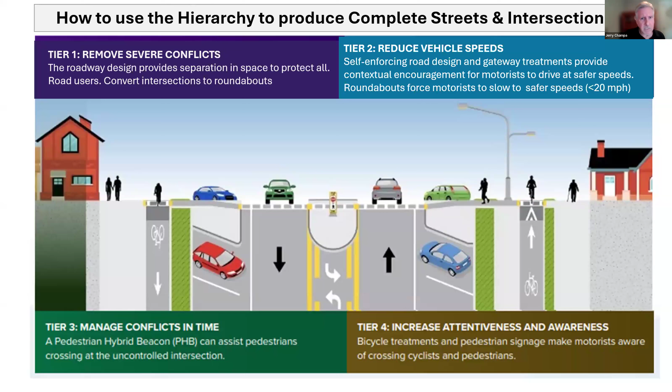What I did not cover yesterday, I just wanted to show this. This is in the roadway design hierarchy document as well, and it covers how to use the hierarchy. It's just a snapshot of how this would apply to a project trying to create a complete street. I'm not going to go through the details here, but this is the kind of information and general guidance available in the document. I think the link was on the slides yesterday.

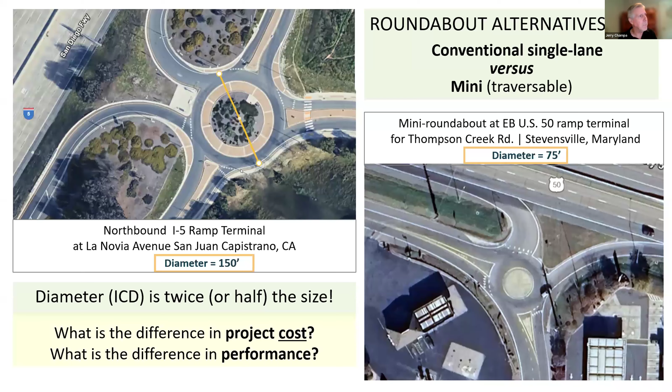As Phil was saying, this has been designed, tested, piloted, evaluated, redesigned, and strengthened over a 10-year period. So in this case, we're putting in what would be a quick build, low cost, but permanent installation. I just wanted to emphasize that these can be permanent installations, not just temporary or interim, even though they are modular. I'm hoping that with those slides, maybe that will help generate a few more new questions. So that's all I have.

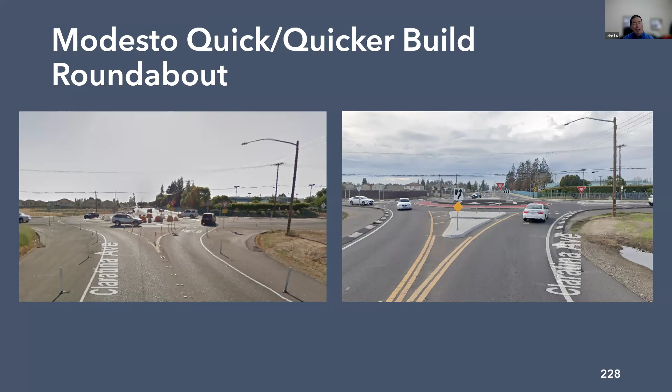Okay, next on deck we have Brian Ray. Brian Ray is a great friend of Caltrans. He has over 35 years of practical experience and has supported Caltrans since 1999, when we were just starting to explore roundabouts on the state highway system. He's been involved with numerous national research publications applying performance-based planning and design, including ramp and interchange spacing.

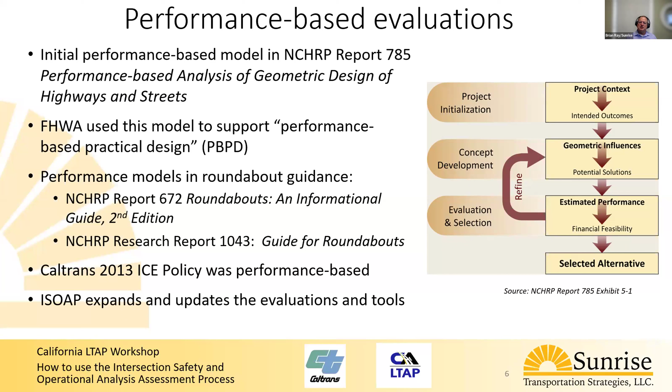I've always been a champion of Caltrans' ICE policy and ICE activities. I've always found that the flexibility in the ICE was really a benefit compared to a very restrictive, prescriptive approach. I'm hoping that when we look at ISOAP, it still contains the value of the flexibility and the engineering judgment without being too prescriptive. And I think ISOAP is going to be a really nice positive change in addition to go on from where the ICE policy was.

So I want to just highlight that performance-based evaluations and performance checks aren't just part of roundabouts. When we did NCHRP report 959, the Diverging Diamond Guide, it's actually based off of looking at real case studies and examples of elements we might want to do differently, and legacy elements we don't want to do anymore. It identified general performance categories, verifying that design users are integrated into the process, not accommodated later on, but integrated into the design.

Even chapter 6 highlights that when beginning your DDI design, you should start from the inside and work out - from the pedestrian area, if that's where it's going to be, and work outwards from there, from the center of the roadway and out in terms of your crossovers.

But it goes back to the fundamentals of intersection design and roadway design - stopping sight distance, intersection sight distance, view angle considerations. So if you're thinking about roundabout performance, you've done those speed checks, you've done intersection sight distance, you've looked at view angles.

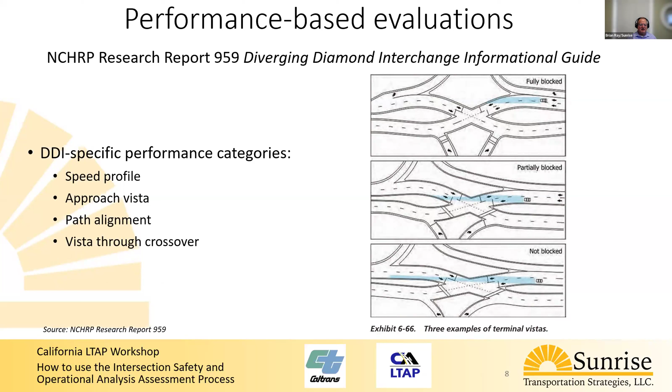If any of these terms are new to you, I encourage you to look at chapter 6 of the DDI guide, because many of these follow the same basic principles from the roundabout guide, the work you've been experiencing before.

ISOAP - it's a pleasure to have been able to offer some input about ISOAP. One of the things I tried with John was to get rid of the word 'process', just stop it at the A, let's just have it as an assessment, but I couldn't make that influence. So now, just like the word automatic teller machine becomes ATM machine, you have the ISOAP process.

We'll get there. But as we talked about yesterday, if you listen to Bastian, it's really an intersection control methodology. And this methodology itself has been evolving nationally since the mid-2010s. Caltrans was a really early adopter in doing some outstanding work with the ISOAP, but other states have expanded the ICE tools and evaluations.

SPICE is the safety performance of intersection control evaluation. It was a planning level tool prepared by the Federal Highway Administration. CAP-X is a very simple approach to using planning tools to test capacity and operations.

They're all meant to aid and guide what you're doing. One of the things I think is most important, that John Liu had indicated, is the tremendous flexibility - you can use these tools, but you're not obligated to. You can use rules with them, you can use other methods, and of course if you have the data, you can go in and do more evaluation in more detail. But the intent is to be flexible in making your choices.

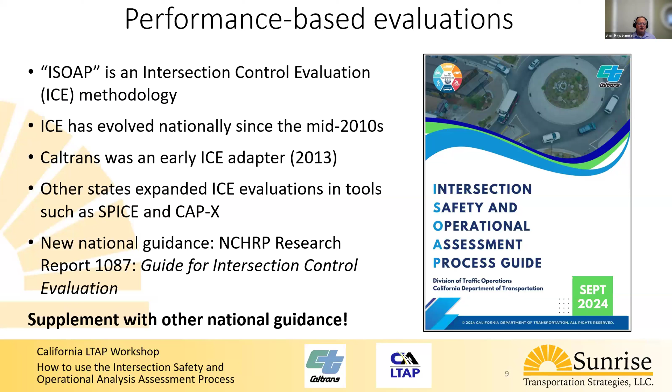What we also want you to do is, just like Jerry was mentioning, use the safe system approach, the SSI safe system for intersections. There's a lot of other national guidance out there, and all of these can complement what you're doing with the ISOAP. The ISOAP guide is a great framework, it helps you get along, but I don't want you to be restricted or limited by it. Be comfortable using other tools and areas. The key is to document what you're doing, have conversations with your project team, and use this other information. So use ISOAP for good and not evil, okay?

In summary, performance-based analysis and design is really excellent because it allows us to tailor solutions to meet project needs. I know you're used to the Highway Design Manual, but if you look at the 2017 AASHTO policy, it identifies the ability to categorize projects as new construction, reconstruction where you're making a fundamental change to upgrade the facility, or where you're essentially reconstructing the roadway and leaving it in its present form.

If we start with those as the basic category of project, it means we can establish design criteria tailored to meet that project need, but it gives us flexibility in design. By identifying what we're trying to achieve, it allows us to justify decisions. So if we're working in a roundabout with approach geometry, having 35 or 40 mile per hour speeds on a state highway can be okay. We don't need to justify 55 or 65 mile an hour curves at that roundabout. It allows us to use the performance in that roundabout influence area to make design decisions.

What's fantastic about the intended outcomes, which you'll see is part of stage 1 of ICE, is it allows us to optimize the value of the project solutions. By really documenting what we're trying to achieve in a project, it also allows us to reduce our liability, which is an important part of our decisions. Design flexibility without any reasoning isn't very good, but having a basis from which we start our design, using design flexibility and documenting it for the conditions we identified and agreed upon at the beginning, is what helps manage our risk.

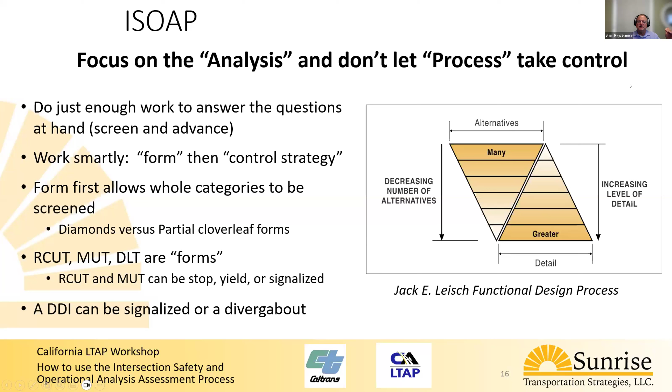When you're looking through your ISOAP, it's going to be really easy to just pull up the list, but you want to be thoughtful about how you apply the solutions when working at the list. I was just in Atlanta last week at the Transportation Research Board Roundabout Compendium and International Symposium, and there was this huge push for everybody to come up with a fancy new name for their roundabout. I heard something called a super spiral, a turbo-esque, a turbo diesel, just ridiculous things. Don't do that. There's always going to be a new interchange form, a new intersection form, and somebody's always wanted to coin a fancy name. But that doesn't always mean that just because it's out there, the form is appropriate.

So this is a list of what's called control strategies, but what I'll tell you is these are actually intersection forms, not control strategies, so we've got to watch that out. A continuous T intersection is for a three-legged intersection, so if your intersection is a four-legged intersection, you don't have to look at a continuous T or go down that list.

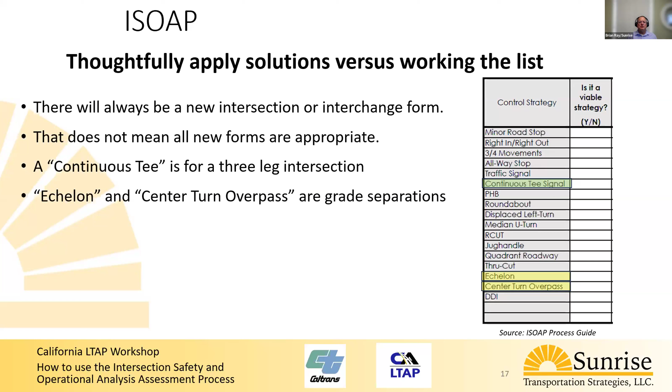An echelon and a center turn overpass are grade separations. So if you've looked at your project, intended project outcomes, your budget, and the environment around it, neither of these are going to be appropriate if an at-grade solution is what you're looking for at that location. The echelon has been around in name for probably 20 years, but I don't think there's actually an echelon on the ground that I can find. I did some search, it's been investigated, it's got a super cool name, but I don't know if you can find one that's actually in place. So be very careful about that.

If your location doesn't allow for grade separations, then you don't have to look at these—don't spend any time on this stage. And remember, a pedestrian hybrid beacon is really for pedestrian quality of service. It's an outstanding form, an outstanding control.

We want to think about all types of high visibility intersection forms, but be thoughtful about where and how it goes. And remember, a diverging diamond is just one variation of diamond forms. It's a great form because it has that displaced or relocated left turn that reduces crash severity. But there are other diamond forms too that have those same qualities of displacing a left turn and reducing that crash risk.

The important part for you is you have a list—consider this as a starting point, something to get your mind going. But know that anytime this list is put together, it's never going to be comprehensive. There'll always be something else. So be careful of that. Work the solution, don't work the list.

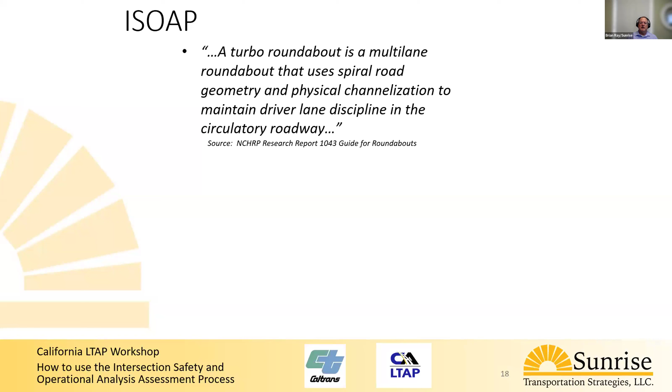This is a quote from the Roundabout Guide: a turbo roundabout is a multi-lane roundabout that uses spiral road geometry and physical channelization to maintain lane discipline in the circulatory roadway. I wrote that—that's chapter 10. The reason we wrote this is that the term turbo is one of these exciting new names. Woo, it's a turbo, it's a super turbo, an inverted turbo, a hyper turbo. The whole point is we get caught up in the names and forget what we're really trying to do. It's a multi-lane design. We had issues where lane discipline isn't there, and there are physical features to address that.

So this is your SR 156/25 intersection. Not all turbo forms have to be of this Dutch variety. This Dutch style shape is really excellent in the constrained environment. It was really appropriate to address that merging and diverging on the skewed intersection approaches. Those physical forms and elements were a great solution at this location.

Fantastic, rock on, good. But we can also introduce turbo characteristics or turbo elements. This is an example in Sarasota, Florida, where it's a multi-lane design with raised features intended to support lane discipline. I say that because I don't want you to get caught up in something shiny and exciting—recognize we can borrow and use the same elements and move away from the shiny names, and think about the performance you're trying to achieve.

What's the performance I want? I don't want people changing lanes in my roundabout—that's where it comes from. This is just an example of one of the approaches on this roundabout. It has path alignment that aims you into the circulatory roadway, physical features that help keep drivers in their lane, and uses raised pavement markings and enhanced striping to support lane discipline internally.

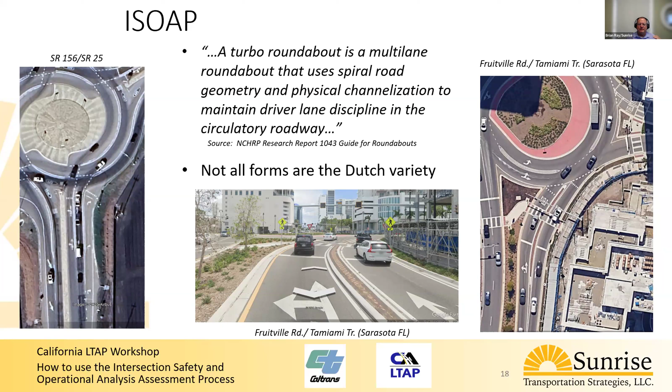Interestingly, Georgia DOT is beginning to introduce raised features on their roadway approaches for multi-lane designs—not necessarily throughout the roundabout, but at least on the approaches. I want to share that because I don't want you to get caught in the name turbo and suddenly think you have to hire an expert for its mystique. No, it's a turbo as a way to keep people in their lanes. The features are the same. Hope you're catching that.

So learn the forms and then use the correct names. These are names over the years of intersection forms that were used to market and sell the form—some of these were actually sold. A CFI—boy, I wish I had thought of the word CFI. A continuous flow intersection takes a single intersection and breaks it into 5 other signalized intersections in total, and still has the nerve to call it a continuous flow. Man, you gotta love that.

Super street—ooh, gosh, that makes me feel good, I got a super street. I have an urban interchange—wow, I can only use my urban interchange in urban areas. Or I have a Michigan left—I guess it won't work in California, it won't work in Florida. Did you know that a HAWK signal—I hear that, I was at a conference last week and somebody was asking me about a HAWK signal. It was actually originally called a HAWK beacon, and HAWK stands for High-intensity Activated crossWalK.

It's one of those crazy things that somebody saw that the British have pelican crossings, toucan crossings, and in Tucson, Arizona, somebody wanted to create this beacon and came up with this high intensity activated crosswalk and then put the name HAWK to it. Again, like continuous flow intersection, HAWK.

Don't know how that worked through, but you got to love the creativity. But in the United States, we can't have signals rest at dark. What happens when a signal rests at dark? It becomes an all-way stop. So it has to be a beacon. So originally the HAWK was actually called a beacon, but what do we call it now? Well, now it's formally called a pedestrian hybrid beacon. That's the origin of the name. So let's start calling them pedestrian hybrid beacons, or PHBs.

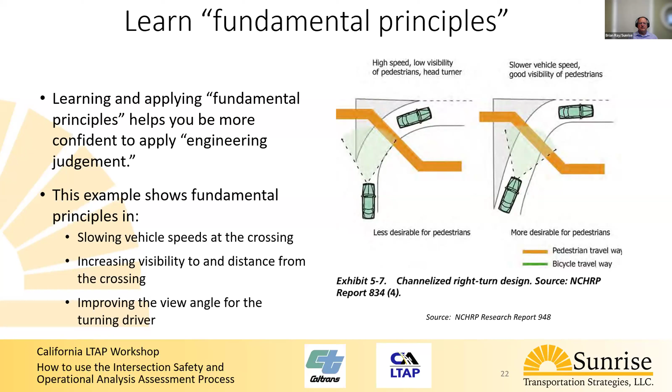And so while this view angle - this is a diagram showing it as a lane add - many times we used to pull up these diagrammatics or have intersection designs where there's no view angle for the driver. So learn intersection fundamentals and apply those. That's what's going to help you learn how to say yes.

Learn new concepts. Are you familiar with protected intersections? They're using design elements to reduce conflicts between pedestrians, bicycles, and motor vehicles. The principles of protected intersection are to minimize exposure to conflicts, reduce speed at conflict points, communicate right-of-way priority, help people understand how to use the roadway, and provide sight distance.

Now, do those five principles sound similar? While they came out separately, these are a lot of the same kind of elements as Jerry was highlighting - the roadway design hierarchy: removing the conflicts, reducing the speeds, managing time with our conflicts, or increasing the attentiveness. So this concept of protected intersections is something that's relatively easy to do.

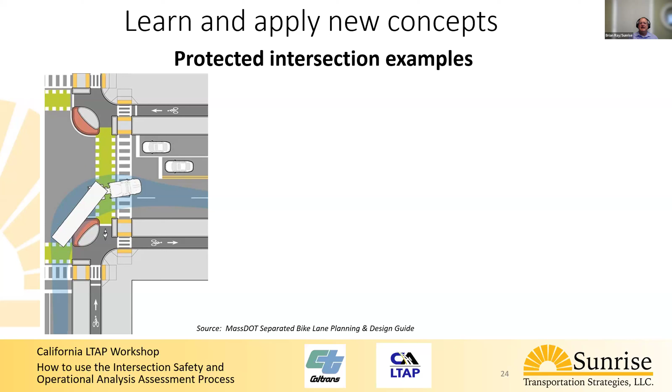And so here are some examples of this. If we look at this tight location, probably very urbanized, what you can see is it's an environment with many users. That truck is turning very slowly, but if you look at the pedestrian facilities, they're separated from the bike facilities. There's a separation between the bicyclists and the pedestrians. The truck that's turning can't right hook the bicyclist who's in the intersection.

And here's just, again, a diagrammatic from the MassDOT guide. But what you can see here is we're starting to look at each of the users and design for each user.

And for you as geometric designers, look at all this great stuff we can possibly do. We need to know what size truck that is, whether it's an STAA or California legal that we can cover. We want to be thoughtful about the environment, and we may not be able to do this in all locations, but I want you to be aware of where this works. Did you realize that NCHRP Research Report 1043, Guide for Roundabouts, has similar elements in it?

Gina highlighted this, that your Caltrans HDM still references and uses the principles from NCHRP 672. That's okay, 672 is still really good. This 1043 document greatly expands on the contents of 672 and provides a lot more information.

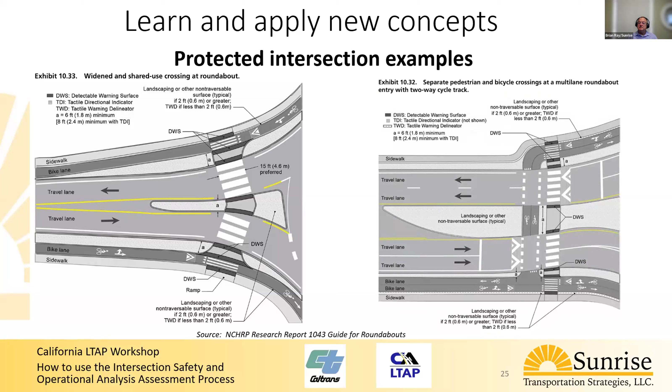Here's a simple single lane roundabout design with treatments for pedestrians and bicyclists. What you'll see is we're separating out those users. And here's another example at a multi-lane design where we can separate out the peds, the bikes, all of those users. While we often think about that at the crossing location, if you look at either edge of those roadways, what we're doing is detectable warning strips, looking at the conflicts between the peds and bikes, as much as the bicycle and peds and motor vehicles. So this stuff is around here.

Also, what can you do to learn how to say yes? Understand precision versus accuracy. So here's our roundabout guide, here's our typical way we can look at things. You've done this before: you calculate an R1, you pull up the table from AASHTO. It's highly impressive because it has funny numbers and diagrams in it.

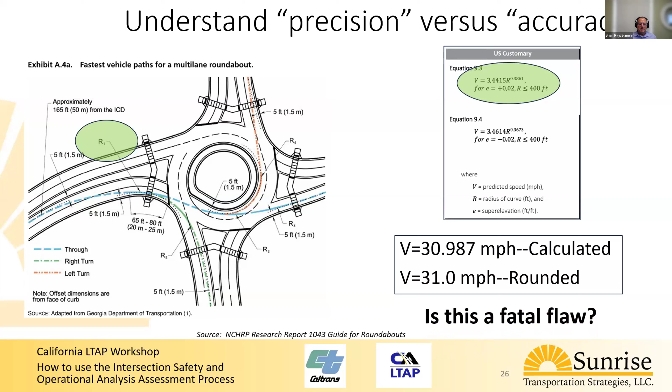You put that radius in, compute for the speed, and come up with 30.987 miles per hour. That's what you calculate, man, that's good. Well, I don't think I can carry it out that far, I'm going to round it up to 31 miles per hour. Okay, well that's a pretty big move there. But what's the entry speed for a multi-lane roundabout? 30 miles per hour. This is 31 miles per hour. Oh my gosh, is this a fatal flaw? Is this roundabout thrown away? Oh, I don't know, what am I going to do?

Well, let's understand where this comes from. First, when we compute our speeds, it's based on picking a portion of that 65 to 80 feet at the entry. Make sure you're back about approximately 165 feet from the outside edge if I'm using ICD, if I'm using CAD. Let's go ahead and draw that fastest path. Which way do I do it? How close do I do it? We all do it a little bit differently. Okay, so that's how we got that R.

Well, let's take a look at our vehicle. Clearly every vehicle in the world is 6 feet wide. So clearly when I'm using my offset of 2 feet to a fixed object, it's 5.0 feet. All my curbs must be the same. All my drivers must be the same. All my vehicles must be the same.

But the real important part here is, what are the project considerations? Are there other curves in here? What's the environment around it? What's the message that the land use is telling us? Do we have features and elements up and downstream? Is it part of a roundabout corridor? Is it the first intersection off a ramp terminal interchange where nobody can pick up speed? We need to think about all of the project considerations, or what's the benefit of this roundabout compared to the other intersection form?

So that leads me to this: don't hold out for perfection. Focus on optimal solutions and how they attain the greatest value for the project. If we think about our existing condition, what are we trying to achieve and whom are we trying to serve? There's probably some sort of ideal design, is it a nominal approach that Gina was talking about yesterday, where I have to pick a value from our standards? But the key here is we often get so caught up into what's optimal, but what can't I achieve? What's missing? I can't get that standard, I can't get the 500-foot radius, I can only get 450 feet. And we get caught into that, and we're afraid to make a decision, and we don't know what to do. The point here is, let's focus on what we gained.

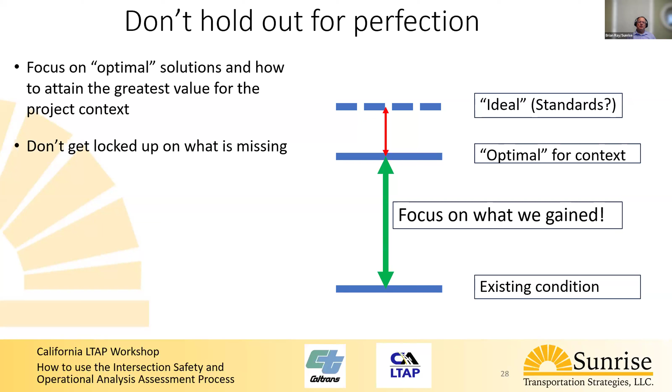How many projects that were really, really good projects ended up as no-build because nobody could make a decision, because we were looking for the optimum, the ideal, that we had to have perfection. There are a lot of places, even in Caltrans, where good roundabouts didn't get put into place because people were looking for the ideal and following some criteria that was non-attainable. Gina mentioned this yesterday, and I had it in mind too: a roundabout design that is less than ideal could still provide superior safety and operational performance over other alternatives. The point is, let's see what we can get from the roundabout, let's not worry about perfection.

So in closing, you are in a fantastic organization, and I'm proud to be able to work with Caltrans. You're implementing policies that support reduced crashes in total, but especially severe and fatal crashes. You have the opportunity in your planning and design decisions to save lives and money while you do it. You get to be the stewards of the money around you. And what I say is, challenge yourself with continual learning to gain confidence in making your planning and design decisions. So that's my pitch, and I'm sticking to it.

So I'll open it up to questions. John, I hope I get to be invited back some other time. I haven't upset the cart.

Great, thank you so much, Brian. You were just so chock full of information on various topics. You covered technical things, practical design, some philosophical things, and I think really a good challenge to each of us to be the best engineer—and planner too—that we can be. We all have limited resources to build our projects, so I think he had a lot of things we could all heed and really improve ourselves. We do want to open it up for questions.

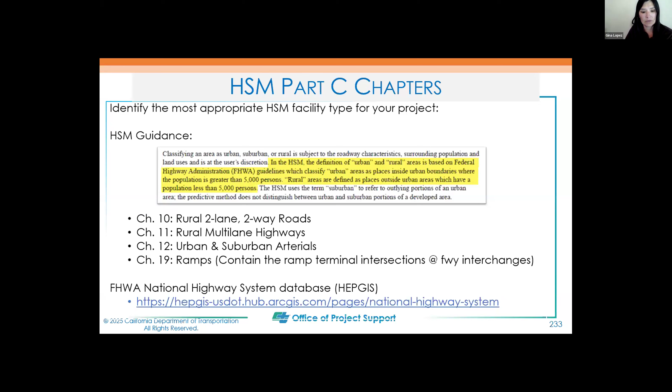Something I want to note right off the bat that you won't get from this cheat sheet: I highly, highly, highly recommend popping open that highway safety manual. Again, this is a cheat sheet. It's a starting point, but there's so much more detail and additional information.

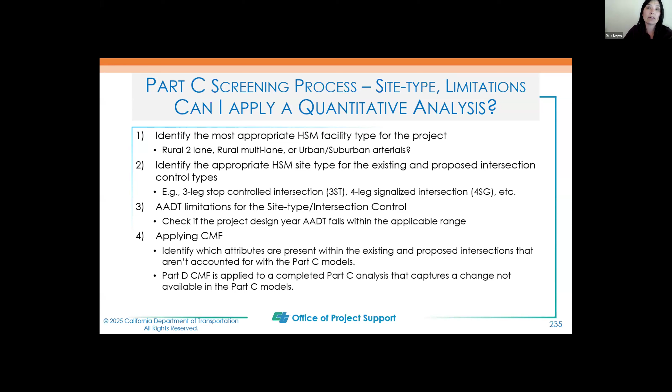So again, this just basically goes over the steps. And number 3 is kind of reminding me to go back, because the limitations on the traffic volumes that these crash prediction models can handle can be a roadblock at times. And then the CMFs are also going to be different. So your crash modifications, your Part C CMFs, each of your crash prediction models takes into account different geometric features and different traffic control inputs.

We talked about the limitations and focused on Part C, but I want to really talk about Part D, the difference of using Part D quantitatively versus qualitatively. This is going to help us fill those gaps when we do have limitations with the Part C models. We get this question all the time: are you using Part D quantitatively or qualitatively? Because there are two different ways to use the Part D CMFs.

Essentially, these are standalone crash modification factors. They are apart and separate from the Part C crash prediction models. That's why they're in a completely different part of the Highway Safety Manual itself. We've talked about crash modification factors all afternoon yesterday, and we're going to continue to talk about crash reduction factors, crash modification factors.

I think we all realize that these are basically either a countermeasure or representative of your change in crash frequency, depending on how we're applying it. And there's two main ways, right? Quantitatively and qualitatively. I think the two definitions are pretty self-explanatory. Our preference is to use Part D quantitatively if we can.

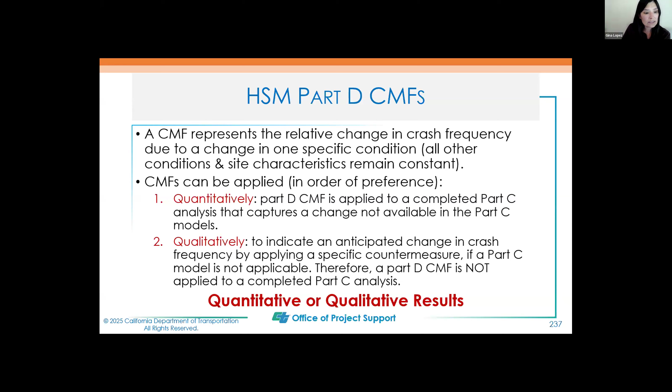A lot of limitations - if you cannot apply the HSM quantitatively, then you can resort to a qualitative analysis. And this is essentially where you're going to go: the FHWA CMF clearinghouse.

Many times in our live trainings, I would reference that all of the percent reductions in fatal and injury crash severities that Jerry and John and all our good speakers have been talking about came from the CMF clearinghouse. Sometimes there will be a direct reference to the crash modification factor report that study came from. So when Jerry's been stating the reduction, that's essentially the same thing as a crash modification factor. It's just your CRF is 1 minus the CMF. So when Jerry said roundabouts are showing up to 80, 90% reduction, basically you would say my crash modification factor is going to be about 0.2, 0.1. It's your 1 minus 0.8 or your 1 minus 0.9.

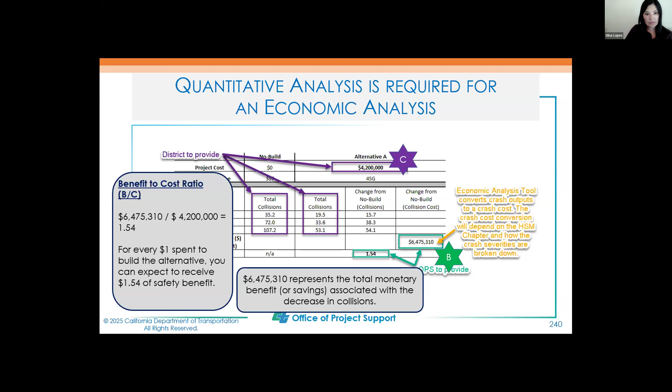So with that, I think, John, you're going to quickly introduce the example here, and then Bernice will walk you through how we actually applied it to this specific project for ISOAP.

Yeah, so I just want to set up this example. This is in the city of Mendota, which is about 35 miles west of Fresno. And this is a roundabout that's actually under construction right now, but we chose this location as a test case for ISOAP and the HSM.

So it was actually run under ICE, but as an exercise, we wanted to apply the HSM to it. At this location, the city received a CMAQ grant to build a roundabout at the intersection of two state highways, 180 and 33. These serve as the main streets for Mendota, two-lane conventional highways. There's about 16,000 vehicles entering the intersection every day, so that's well within the realm of a single lane roundabout.

So the idea was to realign the intersection, the junction at McCabe. McCabe is an access to a residential street, also provides access to a school. You have a fire station right at the corner. And just to kind of clean it up, we wanted to create a four-legged intersection. There's a lot of costs involved, but at the time there was enough money with the grant and other sources of funding. Next slide.

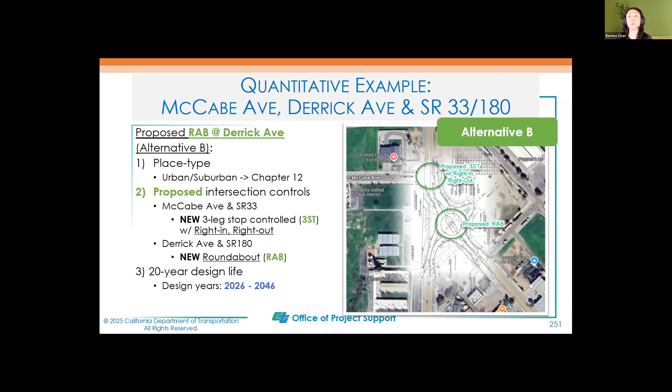As we recommended earlier, when we hit a limitation relying solely on the Part C models, we may have to turn to Part D CMFs from the clearinghouse. Please be aware that when searching and entering keywords to query the clearinghouse database, it can be a little tricky and takes some time to get used to and become proficient with, like Gina mentioned.

When we queried this in the CMF clearinghouse, we didn't put all those words in. We picked out specific words, tried them in the query, and went through the results. For anyone not familiar with the clearinghouse, searching with query terms and words may kick back a lot of different results, and some of those may come from different parts of the world. You may not want to use the European ones because our context is different than theirs. So it takes some time and patience to sift through them to find the best match.

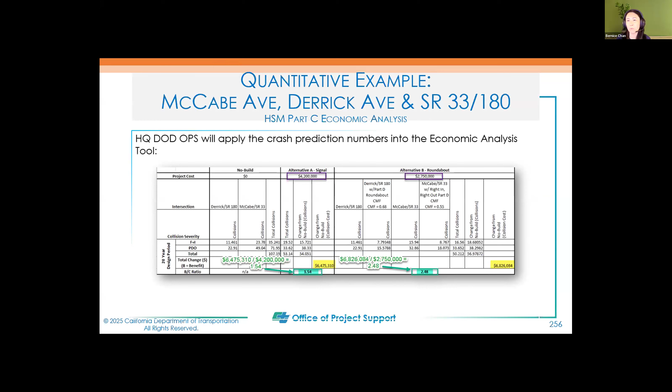I know I went through that fast, but unless Gina has anything to add, I don't know if we have time for questions. I do know Jerry's coming up after us, and we have 5 minutes left for this segment.

There's actually a question I would like to address from the chat: where does the CMF Clearinghouse get their values from? Good question. I want to come back to this slide, but yeah, I'm going to go back to the CMF.

They come from all over the world, from researchers, possibly NCHRP studies. Essentially anybody can propose their results and research to be uploaded into the clearinghouse, but it has to be vetted through. I'm not sure of their exact process for getting approved into the CMF clearinghouse, but there's a ton of information on how they come up with the CMF and the star rating, including how much weight is given based on number of sites, years of data acquired, and type of analysis performed. So they come from all over, but there's a vetting process to get your CMF uploaded into the database. The most important part is that they come from project evaluations, before and after project studies.

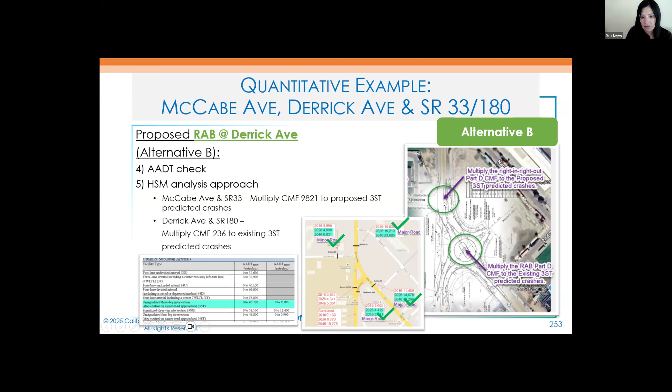For this particular instance, applying the right-in, right-out CMF to the proposed condition - something we didn't talk about was another addition to this project, maybe easier to see on a bigger scale - they implemented a left turn pocket from the main line onto McCabe. If you're not familiar with what the HSM can take into account, you don't even realize that's a change from existing to proposed condition that the HSM can account for.

So we need to rerun that analysis for the proposed condition, because that's what we want to multiply our right-in, right-out CMF to - the proposed condition - since there were additional features the CMF can account for. If you strictly go to the spreadsheet tools without understanding what you're actually inputting, you will make errors because you're not familiar with the background of what you're telling the crash prediction model. You could either over-account for the safety benefit, or under-account and cut yourself short.

All right, any other questions, John? I guess we could answer them via the chat. Yeah, there are some questions in the chat and also in the Q&A box, but for time reasons, let's go to Jerry. He has a bit more to talk about safety performance, and then we'll see if we have additional time after that for additional questions. Okay, so Jerry, I'll hand it off to you.

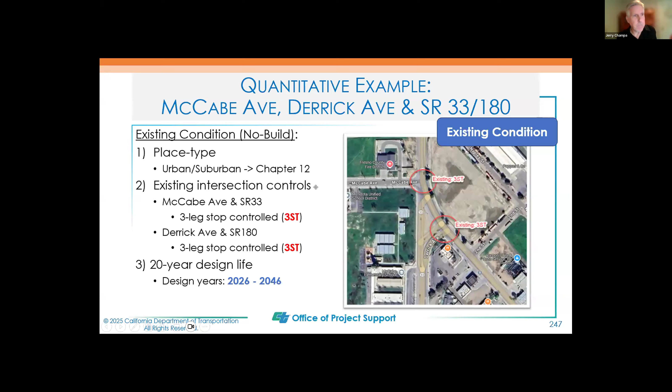So what I am going to cover in probably the next 10 to 15 minutes is a methodology for calculating the collision cost savings, which is the benefit we get from implementing mostly safety improvement projects and other projects. This is specifically a methodology that was created back in 2013 when ICE was first adopted, and this tool was created to help us calculate the benefit cost ratio and collision cost savings for control strategies.

I want to mention also that this methodology is currently being used by the local highway safety improvement program. All local agencies that submit applications for safety grants involving roundabouts in particular use this spreadsheet tool, which we call CCA, or collision cost analysis. Caltrans is actually currently using this same spreadsheet tool to develop the crash cost savings and benefit cost ratio for roundabout proposals on the state highway system. So it's an extension of the Caltrans safety programs methodologies - it's as performance-based as you can get, and it's based specifically on Caltrans crash data at intersections across the state highway system.

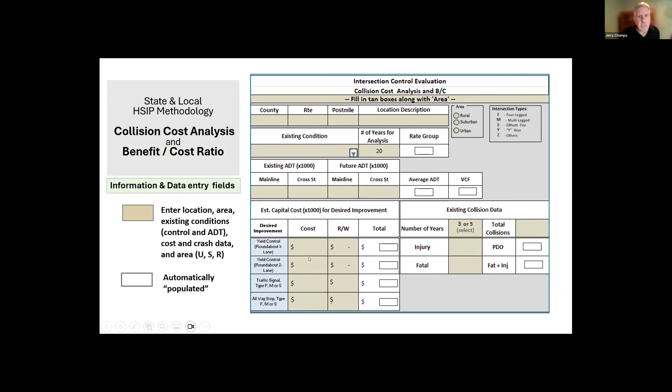Okay, so this is a blank version, the top half of the form where the inputs are put in. As you can see, there's two types of boxes here for the user to enter, but also some of these are automatically populated. Let's go to the next and start to look at what this would look like.

And then volumes in terms of ADT for mainline and cross street. These are for both the existing ADT, but also for future year conditions as well. Most importantly, we have the crash data that is entered in the right half lower part. You end up having a number of total collisions, number of injury and fatal collisions. Some of that gets populated automatically. The only thing remaining to be entered here are the cost estimates for the alternatives that are under consideration.

So again, what we're looking at here are control strategies. That's the limitation of this tool. It has a single-lane roundabout, a two-lane roundabout or hybrid, and then traffic signal and all-way stop control, those being the most common improvements that two-lane or two-way stop control intersections are usually converted to for safety improvements. Let's go on to one more slide.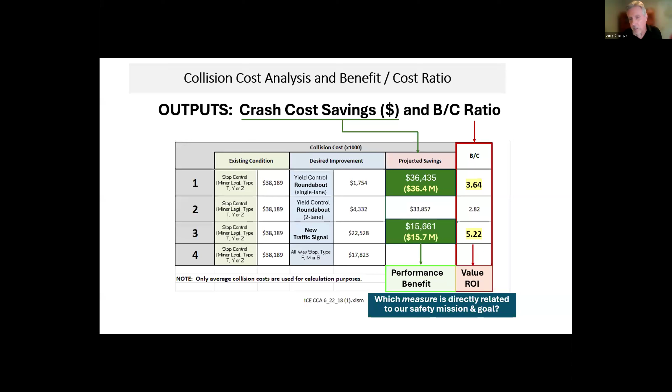Let's go one more slide. Ordinarily, if we had more time, we could talk about where this stuff comes from, where these outputs come from in terms of the numbers, the collision cost savings.

And time doesn't allow it. It is rather difficult to explain. There's always a black box that does these calculations.

What I would say is what's most important to consider here is based on all of the data, substantial data that we have been collecting along the state highway system, crashes at every intersection, and that being categorized into different types of intersections, different control strategies, different environments, which are urban, rural, suburban, even the geometrics of the actual locations.

There's subcategories or rate groups, and there's a lot of algorithms and cost comparisons happening in here. So it's extremely data driven, and it's all on Caltrans crash data. So we're getting results we've relied on in our safety program for decades.

So this methodology is giving us, as much as the data in the tool and the crash costs are updated, this is a good estimate of what we're going to get with these different alternatives. So I think I'm going to stop there and see if anyone has any questions.

Very quickly, Jerry, there's a question about where could someone access the CCA worksheet? Well, every district has had these over time. And I think, John, if we haven't done it already, we're going to have to maybe put this, our next speaker could help us by posting this on the homepage for the ISOAP Technical Assistance Program.

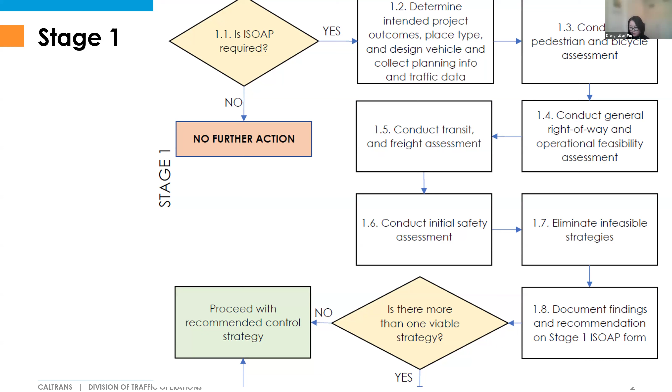SIDRA is the one we use most for roundabout analysis. For more complicated intersections such as diverging diamond interchange intersection, or displaced left turns, or other configurations like Jerry covered yesterday, micro simulation like VISSIM can give better performance evaluation. We also talk about step 2.5 here, when we need to calculate the benefit cost ratio, which involves operational analysis to calculate the delay saving benefit.

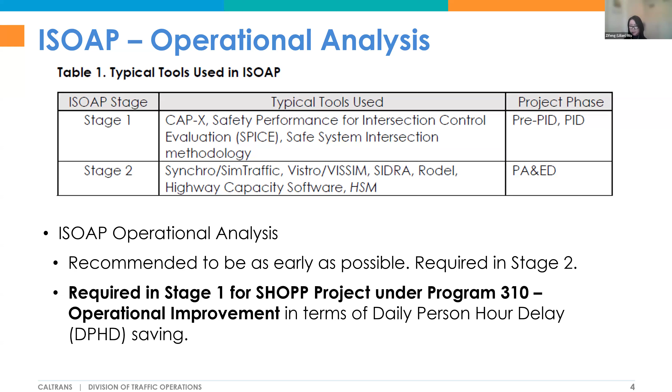So what we've talked about, stage 1 and 2, those are the typical requirements for each stage. Generally, as shown in this table 1 from our ISOAP guide, the delay analysis is for stage 2, although recommended as early as possible because it's somehow relevant to the capacity analysis mentioned for stage 1. I want to get the first key message here: if your project is expected to use SHOPP funding for the OI program, meaning Operational Improvement Program 310, the operational analysis is required to calculate the DPHD in stage 1.

Here's why: the DPHD, daily person-hour delay, was adopted by Caltrans Asset Management as the performance measure for SHOPP OI projects last year, which requires the DPHD saving to be reported during the PID phase in order to get the project programmed. So the project cannot be programmed without this DPHD saving estimate. SHOPP program projects are very time sensitive, and we saw some projects miss the window due to lack of delay analysis in the PID phase.

That's why I want to emphasize this requirement in bold here. Remember that SHOPP projects do need some detailed level of analysis during the PID phase, which is stage 1 for our ISOAP program - they're kind of overlapping here. This was not included in the ISOAP guide because they were both released last year around a similar time, so please be aware of this change. We do have a spreadsheet tool to do the DPHD calculation, and I'll talk more about it next.

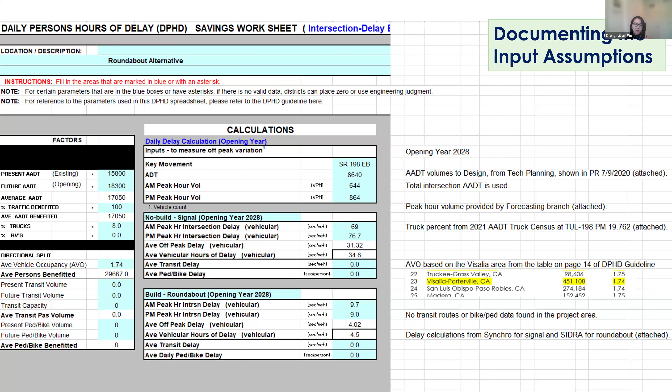Next, we'll take a closer look at what input data will be needed for this calculation. We have the volume data, both existing and opening year AADT.

We need the traffic benefited percentage, which is typically 100% for intersection study. We also have truck percentage, and average vehicle occupancy (AVO), which is used to convert vehicle delays to person delays. The guideline has some default values for your use if you don't have project-specific numbers. We also have transit and ped/bike information. Depending on your project type, location, and purpose, you might not have the relevant information, but you might, so those two can be optional.

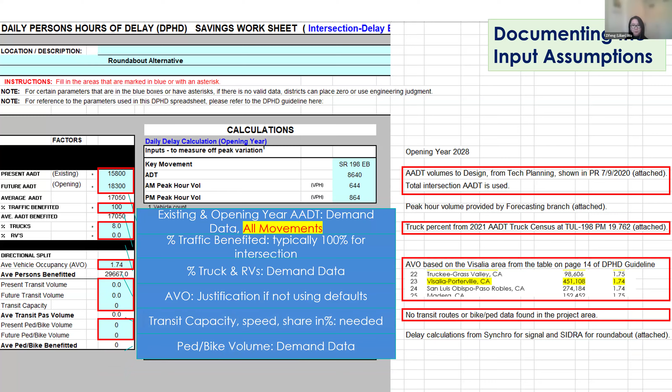In addition, you will also need to forecast the peak hour volumes for the opening year based on existing counts and apply a growth factor. We need to document the sources of the applied growth rates. Sometimes we saw super high growth rates, like 5 or 10%. Then you might want to double check and make sure it's justified.

Last but not least, the tool also asks for the delays for both no-build and build. Note that this is for intersection-level delay, not the worst movement delay, even for two-way stop intersections.

A quick sum up for the Stage 1, or PID phase, operational analysis requirements: if it's a SHOPP operational improvement project, please document your input data sources and submit the analysis files for headquarters review. Once it's reviewed and concurred in our system before the deadline, the project can be programmed for the next SHOPP cycle.

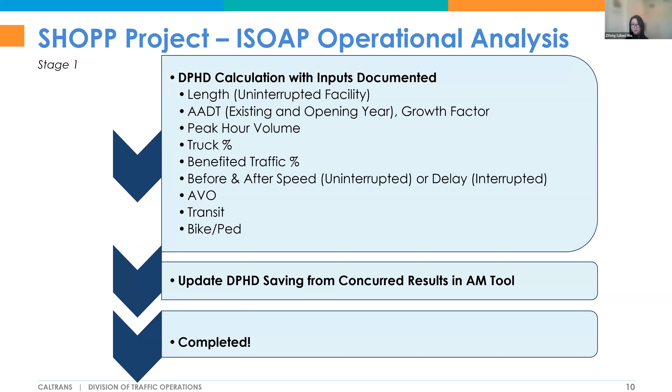Next, let's talk about Stage 2 — the delay benefit calculation for benefit cost ratio analysis, which is one component here under the performance-based analysis metrics in step 2.5.

Previously, I think Jerry just shared about the collision benefit calculation in their tool. This one is similar, but it's for the delay benefit column.

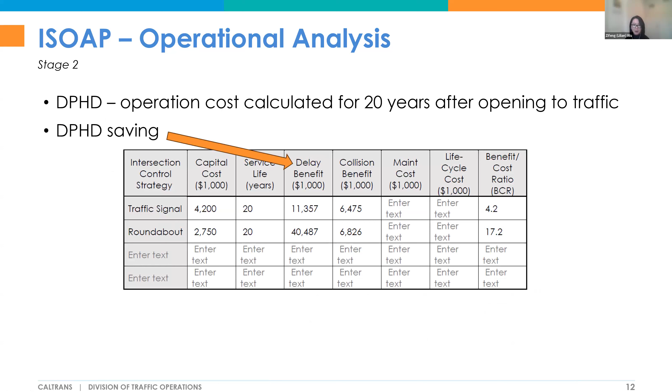Operational analysis is also needed to fill in this delay benefit column based on DPHD savings, which considers the operation cost for the whole project life cycle, typically 20 years after opening. We also developed the Excel tool earlier this year to do this calculation.

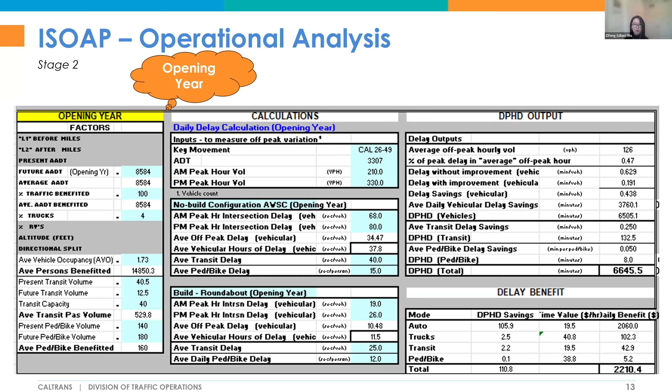The tool looks very similar to the DPHD analysis tool we talked about earlier, but it includes some adjustments for BC calculation purposes, and it includes both the opening year and the design year to cover the whole 20 years after opening. This is a snapshot for the opening year, and the next one is for the design year.

Please note that you will need all the inputs we talked about for opening year analysis to do the same for the design year analysis, such as AADT and peak hour volumes for the design year, and intersection delays using Synchro, SIDRA, or other analysis tools as we talked earlier.

Note that the 250 applicable days here is assumed as the 250 recurrent weekdays in a year. Probably a good default number for your use, but you can also change it. The total delay benefit will be calculated by the Excel tool.

More specifically, the total delay benefit is distributed through 20 years in this example, based on a discount rate of 4.9% and a compound annual growth rate of about 6.2%.

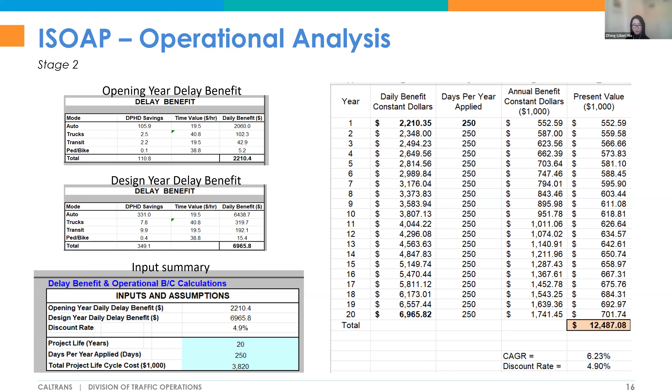Okay, I will end my session with a recap on the key messages as we discussed. For ISOAP stage 1, during the pre-bid phase, think about the input data needed for DPHD analysis if this project is expected to use SHOPP funding.

During the bid phase, in addition to the 8 steps we have talked about, DPHD analysis is also required for SHOPP projects under program 310.

For all other projects, stage 2 is when the detailed operational analysis is needed. We covered the DPHD calculation and the delay benefit saving based on DPHD saving to complete step 2.5.

But in addition, stage 2 is also where we need to conduct more detailed analysis for additional considerations, such as more performance measures about the delay, the queue lengths, the volume capacity ratio, and we might also need to focus more on the worst or key movements, looking into potential queue spillback issues.

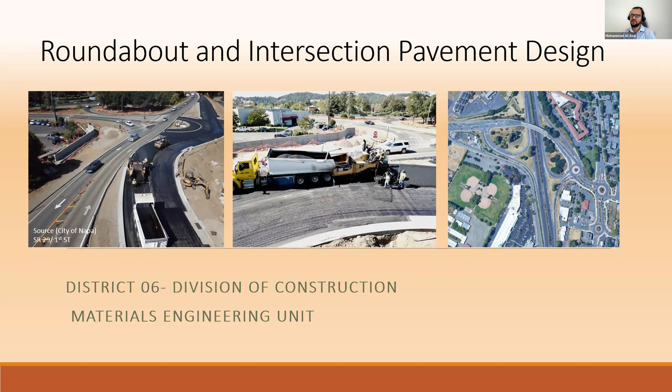Thank you, John, thank you for the introduction. Part of the reason why it's usually preferred to have concrete pavement at roundabouts is because flexible pavement is associated with some types of pavement failures and distresses. If you can go to the next slide, please.

So there are two main common distresses that we see at intersections in general and roundabouts. The first type is pavement rutting, and there are really two types of pavement rutting that we encounter, and it's very important to distinguish between the two so we can mitigate those types of failure.

So the first type is surface rutting. This type of depression on the surface of the pavement is caused by a soft asphalt binder, or a hot mix asphalt using a soft binder grade, that will deform under heavy traffic loads and high temperature.

Due to the nature of intersections and roundabouts, traffic moves at slower speeds. This is because asphalt is a viscoelastic material, so it's time dependent as well, and the time of loading will affect the damage caused to the pavement surface. When you move at a higher speed you will have less damage, while when you're moving at slower speeds or stopping completely, you will experience more damage to the pavement.

The second type of rutting is subgrade rutting, and this type of depression of the pavement is carried throughout all the layers of the pavement, as you can see on the right-hand side of the cross-section sketch here. It goes all the way down to the subgrade, and this is usually due to inadequate pavement structure — we don't have enough thickness of the pavement structure to carry or handle the design traffic loads.

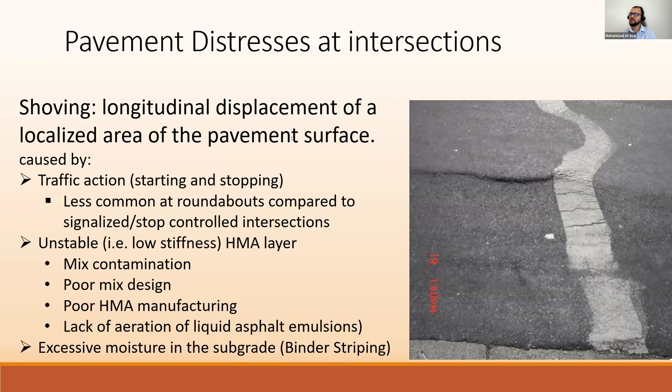Next slide, please. So here I just want to get an overview, I don't want to get into details, of what type of studies we do before we can decide if flexible pavement would be appropriate at a roundabout or at an intersection. We do a lot of review of the intersection history, if this intersection has experienced these types of pavement failures in the past, what type of basement soil we have, what is the expected traffic throughout the design period of this project, and what percentage of that traffic is truck traffic. So all of these are factors that play a role when we select the pavement material.

Next slide, please. Okay, we can select from 3 types of pavement structures. The first one is rigid pavement. It is the preferred alternative at intersections, as I mentioned earlier. It comes at a higher cost, and if we have the right fund allocations, it's the preferred choice. It minimizes maintenance needs, so it will reduce the need for our staff to go out in the field to make repairs to the pavement if there are any types of failures. So it will have a longer life as well.

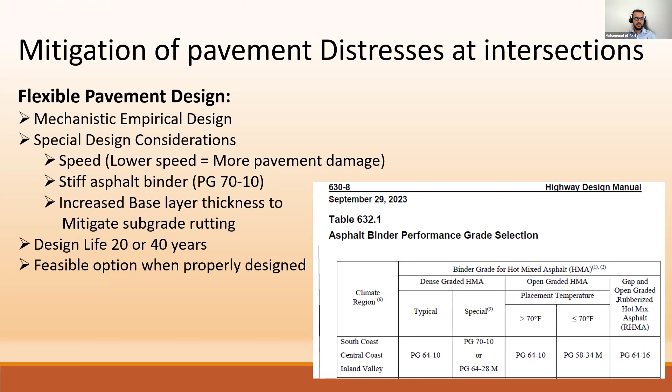Next slide, please. All right, so the third type of asphalt pavement that we recommend, this is limited to intersections that have a lower volume of traffic. We call this a short JPCP concrete overlay over asphalt. So when you have an existing intersection that has a low volume of traffic, usually the average annual daily truck traffic is below 2,000, we can utilize this by removing the top layer of the old hot mix asphalt and white topping it with concrete pavement. And this topic can be referred to in table 632.1 in the Highway Design Manual.

If you can go to the next slide, please. All right, so the way this concrete overlay works, I have two cases here.

Either we have a mill and overlay option, or we can do pavement recycling, either full depth recycling or partial depth recycling, and then applying a concrete overlay. So in the first case, if we have an existing HMA pavement and we would like to mitigate the risk of pavement rutting or shoving at the intersection...

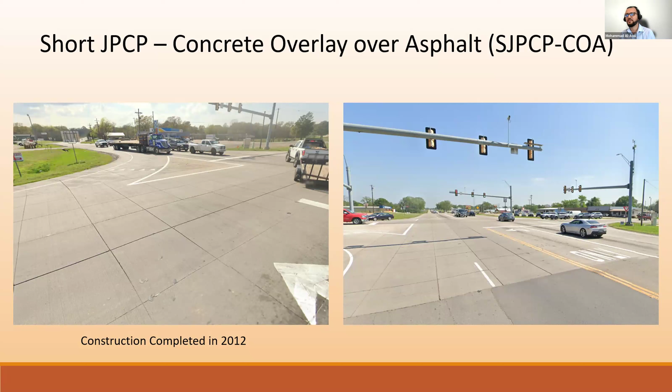There's one question in the chat. The first one is, there's a different pavement noticed on exit off ramps or freeway junction ramps, making a similar sound as rumble strips. What is that called? I'm not aware of any special kind of pavement used on off ramps, not really sure what that would refer to. Maybe this is the grooving of the pavement itself, because concrete pavement is textured, but we usually stick to our JPCP or CRCP, and on an off-ramp or on-ramp situation, it would be JPCP most likely.

Yeah, I'm a little bit at a loss at that question as well. If there's more additional details or the location you could provide, we could probably answer that a little more accurately. The second question is, if short JPCP is only for low volume traffic, how do they have that certain portion in Texas where it looks like there are heavy vehicles passing?

As I mentioned, as long as the average annual daily truck traffic is below 2,000, this is permissible. So you can expect that within an urban environment within the city, on ramps and off ramps. If you have a lower volume of traffic, this option might be suitable. But mainly within the city itself, you will not see this on a highway situation or a freeway. This is limited to some type of urban environments.

Okay, very good. And I do see in the Q&A box about the location, I-605 and SR-91. So we'll try to talk to our friends in Southern California to find out more about that pavement.

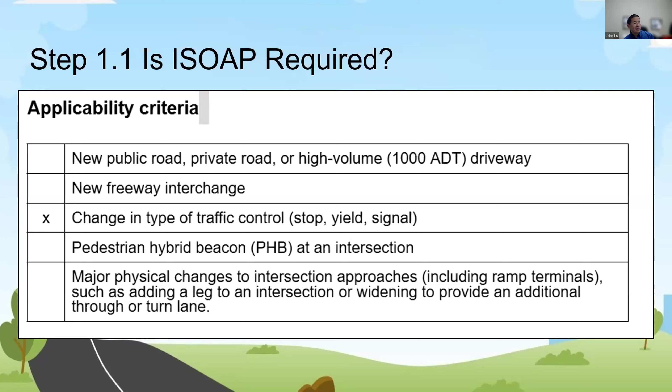So the intended project outcome and gathering data, this is what we're trying to document. Why are we doing this project? For this location, we have an intersection that was triggered by one of our monitoring programs. So the district did an investigation, and we have a safety concern that we're trying to address.

So we want to go and gather what available data we have. Some of the data is obviously the location. We have some of the key issues. We need improved pedestrian and bicycle facilities, and I'll show you a photo. And then the proposed solution is a roundabout.

So gathering some of the data, this is an aerial of the intersection where north-south is US 6, Wye Road is the county road that goes east and west, and towards the bottom left corner you could see a portion of US 395. That's where the highway makes a sweeping curve, and US 6 kind of peels off in a northerly direction.

So this is a location that doesn't have full complete streets. It has some partial sidewalks, partial bicycle infrastructure. Truck traffic is about 10%. One thing I'll note is there is an airport to the east, and there's also a mobile home park. So this is an area that will have a lot of trucks with freight and oversized vehicles, and there are a lot of driveways. This is more industrial, commercial type land use here.

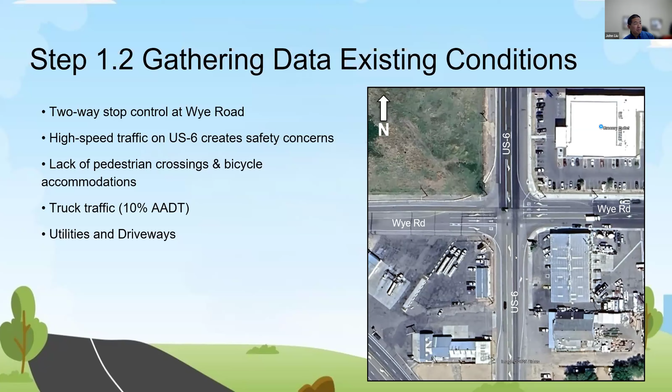So still gathering more data, we get the lane configurations and existing traffic volumes. The volumes are actually fairly low - the state highway only about 4,000 vehicles, the county road slightly more than 2,000. For projections we have a fairly high growth rate, 2.73, but when you're starting with low volumes, future volumes are still low. So this will definitely be in the realm of a single lane roundabout.

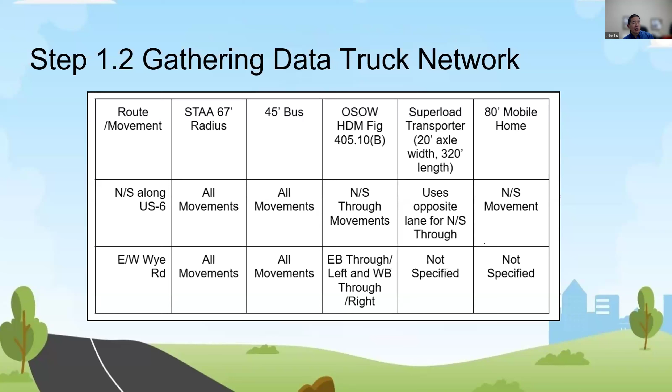Speed limit is 35 miles per hour. I mentioned earlier about the land use and the trucks - this is a location we definitely need to design for STAA trucks, but also accommodating those oversized loads coming to and from the airport, as well as the mobile home park. So we want to look at what specific movements we need to accommodate at this particular location, including all turning movements for the large loads.

So you could start thinking, if we're going to be putting a standard size roundabout, for a rural location with a lot of trucks and oversized loads, 150 feet is a very comfortable size. It could potentially be smaller when you are in a constrained location.

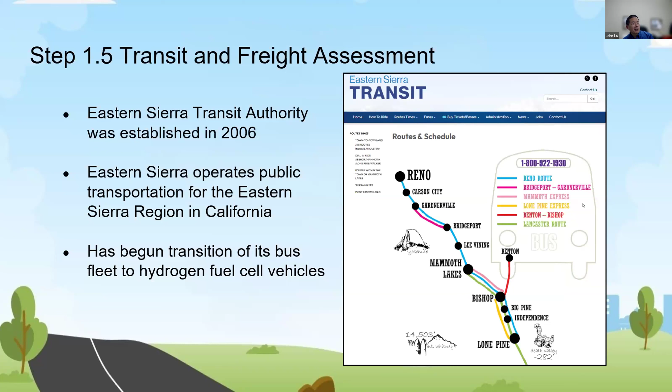Okay, step 1.5, looking at transit, as well as taking a little deeper dive into freight and trucks. Being a more rural location, there isn't any fixed route transit with a stop right there. There's a rural transit line that passes through. It's also noted that the bus fleet is transitioning to hydrogen, but this is not a location that needs robust transit infrastructure. We've talked earlier about truck needs, accommodating oversized vehicles and STAA trucks.

Our initial safety assessment is where we look at what available crash data we have. At Caltrans, we use our TASAS database. We were able to pull up 3 to 5 year collision data as necessary. This location was already triggered by our TASAS Table B report. Looking at the 3-year history, we have 9 collisions. There are no fatal crashes, but there is a fatal and injury collision rate approximately 3 times the statewide average for typical facilities, so it's an elevated crash rate at this location.

Next step is eliminating infeasible strategies, 1.7. The two strategies we want to eliminate: one is the no-build, which is not going to meet our intended project outcomes or needed purpose, since we need to address a safety issue. The 4-way stop is also eliminated, in this case due to unbalanced flows. But as Jerry mentioned before, an all-way stop isn't necessarily a safety countermeasure.

It can be, but this really has to be looked at case by case—is it appropriate to put an all-way stop at a location? Generally, as the intersection gets more lanes, turn lanes, through lanes, it becomes more chaotic, with more potential for conflict. So generally it's not ideal to have an all-way stop as your ultimate traffic control, though it can be an interim traffic control for another improvement. So our focus at this location is really on the signalized intersection or the single-lane roundabout.

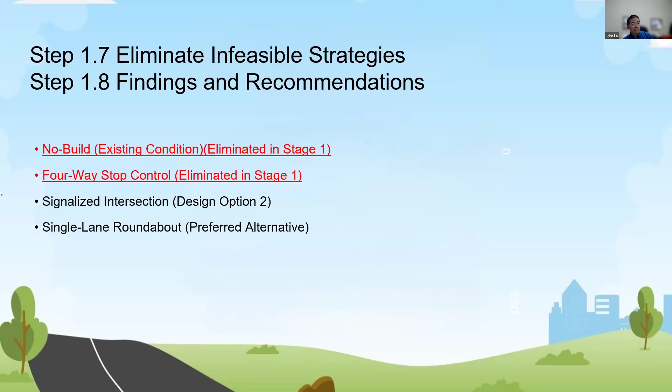Because we have 2 viable alternatives, we need to go to stage 2 of ISOAP to figure out the best performing alternative. The first thing we do in step 2.1 is go through the Highway Safety Manual. This is where my staff went through the whole learning curve, similar to what Bernice went over earlier, about finding the appropriate crash modification factors. We look at the baseline condition, the no-build, get the number of crashes, and compare it to the roundabout alternative and the signalized intersection. We show that our potential build alternatives will have improved safety over the no-build.

The roundabout is about half, and the signalized intersection is about a quarter, as far as the crash reduction.

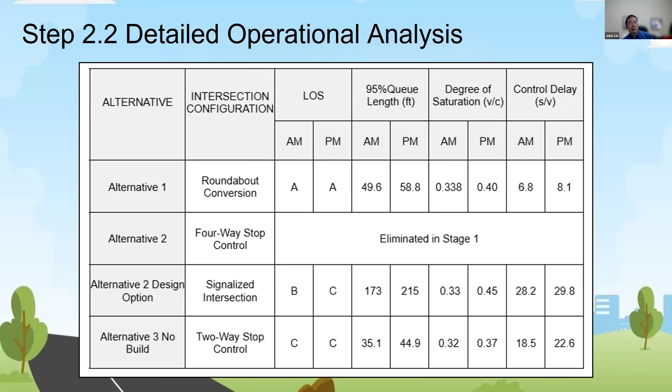We also need to do the detailed operational analysis. This is where we'd typically look at VPHD, as Lillian explained earlier, but sometimes looking at the level of service just provides good information. At this location, because it's relatively low volume, a single-lane approach works whether you're working with a roundabout or a signalized intersection. So we don't really have any capacity issues either way, but you can see the roundabout works best operationally, with the least amount of delay. Even the no-build gives acceptable levels of service. So from an operational point of view, all these work, but you'll have various delays that go into the cost-benefit calculation.

Okay, determine the functional sketches. Here it's important to develop a layout enough that you could get a pretty good cost estimate, because that's really going to be key as to what is affordable and what your available funding is. For a safety project at Caltrans, what we look at is the safety index—can we meet the thresholds where we could justify having a safety project from the SHOPP?

As I mentioned earlier, the designer laid out a 150-foot roundabout, and as I mentioned before, this is a fairly tight right-of-way. What we try to do at this stage is avoid building structures, things that are expensive. I showed you earlier there's a power pole, and there are going to be utilities that will have to get relocated.

You want to do performance checks, as Gina talked about yesterday, because if you start having to make tweaks, it's really going to affect your right-of-way, which could very significantly affect the cost of your proposal. So looking at the signalized intersection, we also need to see what the impacts are, but because the footprint is much tighter than a roundabout, there's going to be less impact.

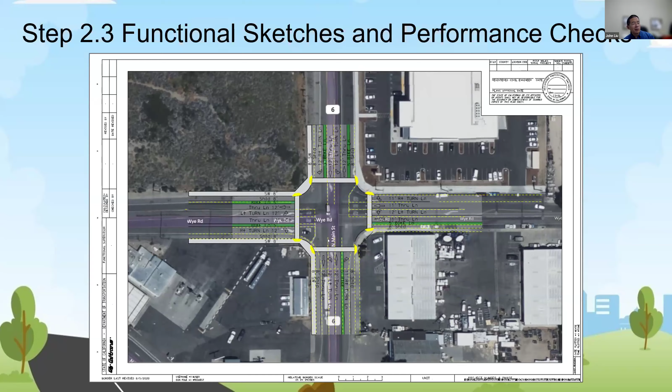Okay, step 2.4, doing a cost estimate, life cycle cost. So we want to develop a cost estimate, and generally at Caltrans, we're only looking at construction cost and right-of-way cost when we're doing our benefit cost ratio.

So my staff used this guide from FHWA, the Highway Safety Benefit Cost Analysis Guide. This is just one tool that can be used, but it's definitely not something that has to be used. This document spells out some of the potential costs that can be used. Besides construction and right-of-way costs, we'd typically include maintenance costs, operational costs, energy costs, crash costs, delay costs, and potentially even air pollution costs, though these are a little less tangible.

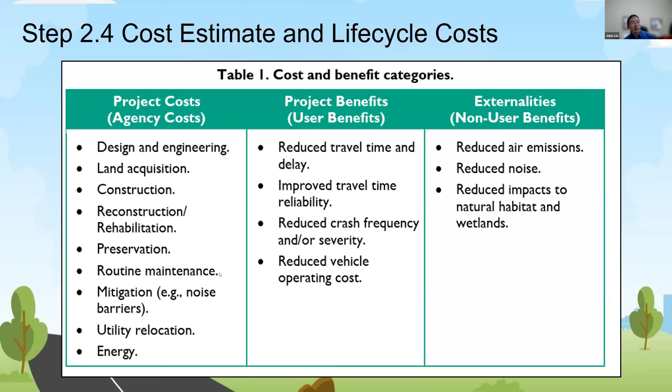But we're also looking at life cycle costs. Eventually the signal equipment is going to have to be updated, replaced, things will have to be refreshed. So all those things can go into the cost benefit analysis.

So this program did some calculations which showed that the roundabout alternative gives about $18 million worth of benefits over the life of the project, compared to $12 million of benefits for the traffic signal.

As it turns out, this was kind of like the first cut, just a draft. But as the project engineer fine-tuned the cost estimate, the cost of the roundabout actually escalated multiple times, to the point of being $17 million for that 150-foot inscribed circle diameter.

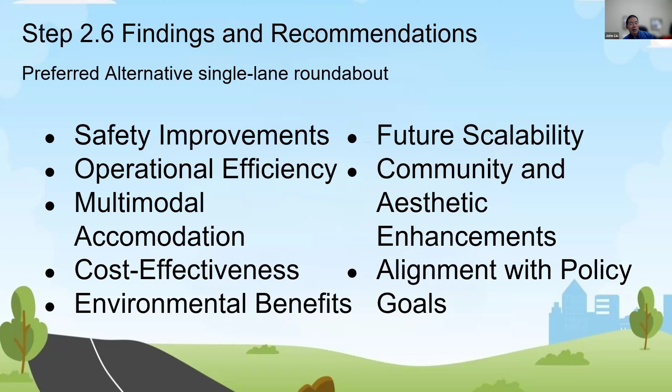Okay, so this is still a draft, but that is the intention. We are looking at potentially doing a lower cost, compact, or possibly a mini roundabout as this project continues to be refined.

Okay, so the next session I really quickly want to cover was locally sponsored projects and local development review, because we see a lot of projects that local agencies want to build on the state highway system. They have to go through our processes for approval.

So local agencies or developers normally work with our planning division. And if they propose a new intersection or an improved intersection that triggers ISOAP, eventually ISOAP is going to have to be done by somebody. Typically, it's going to be the local agency or the developer hiring a consultant.

So the best thing is come to Caltrans and do early consultation. Ask us, is this something that will potentially be approvable? Just share what the concept is, and we'll give some initial feedback, because we don't want someone to spend a lot of time and effort for something that just is not going to be approved.

So if the proposal is viable, ISOAP could be done during the planning process, during the local development review. And a lot of the projects are going to go through the QMAP, Quality Management Assessment Process.

So it's not going to require a full-blown project report, but there are a lot of applicability criteria for whether a project can go through the QMAP process. A lot of times local improvements do go through that process, but if it's more involved, where it requires things like right-of-way dedication, and there's a whole checklist, then it may have to go through a project.

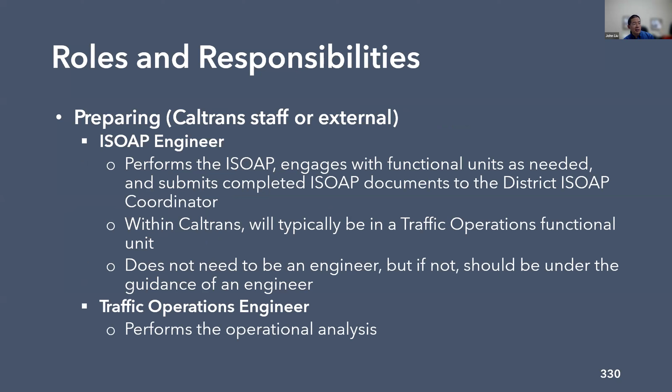So the ISOAP engineer prepares the ISOAP. Typically, it's going to be a traffic engineer that does the ISOAP, but it could be just a design engineer as well. But we'll need to have a traffic operations assessment as well as a safety assessment.

And the project engineer would be developing enough detailed geometrics to get a good cost estimate.

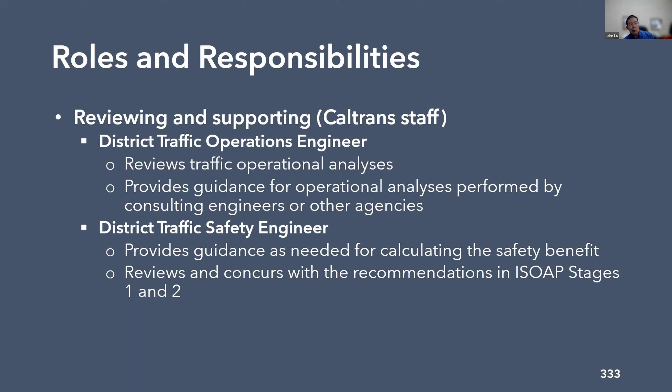So for Caltrans staff, every district has at least one district ISOAP coordinator. This is the person who's going to process all the documents, and it's going to get concurrence from the traffic safety engineer if everything looks good from a traffic operational standpoint. So the district ISOAP coordinator is going to be working with various functional units, traffic operations, and traffic safety.

So one thing I want to talk a little bit more about is when the right solution is not necessarily affordable right now, and I talked about this yesterday. We don't necessarily want to just build what's cheap and easy and be stuck with it. If we could find a path forward to what we want to have built, we want to look at how do we go about finding more money?

Can we do some kind of interim improvement? Can we do something that's built in phases? So this is where we really want everyone to get your thinking caps together and have a collaborative meeting, internally and externally, to find out what the right solution is and where additional funding might be.

Maybe it's applying for grants somewhere. Maybe it's developer fees. Maybe it's just having a plan and then developing some kind of mitigation fee program.

So I want to talk about a couple projects in District 6 where this is exactly what we did. We didn't necessarily want to go with the traffic signal, but we wanted to figure out what could actually be done. So one location is in the city of Lemoore.

This is the Bush Street interchange. It's not a very old interchange, it's about 15 years old. We already are experiencing some operational issues with a ramp backing up.

The city went ahead, had a project study report to look at building a diverging diamond interchange or a full-blown multi-lane roundabout. Those improvements cannot be afforded in the short term. There's development pressures to build more housing. What can we do in the short term?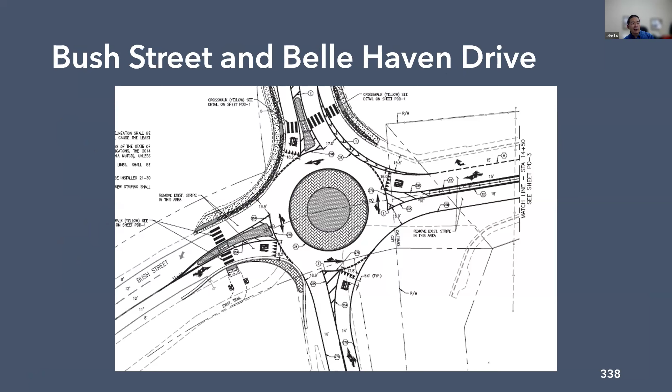So this is where we started looking at, can we build temporary roundabouts or some kind of interim configuration? So that's exactly the path forward. There are going to be 3 roundabouts: one at the adjacent local street, and then at the ramp terminals at this tight diamond interchange.

This is going to be kind of the quick build, or quicker build in the case of Modesto, where it's going to be a lot of paint and plastic, but we are actually going to be pouring some concrete for the splitter islands and some of the central islands.

But this is not a permanent 20-year solution. We do hope to get maybe a good 10, 15 years of design life. The more improvements we build now, the less money there is for future reconstruction. So we don't want to overbuild right now. But as developers build more housing, more money will be collected for the ultimate improvement.

The other example I want to give is Highway 137 in Tulare County, just on the east side of the city of Tulare. We had a home builder who had a requirement to build a traffic signal before their next phase of houses. This location was going to be an ultimate 4-lane conventional highway, and it was already set to have a signalized intersection. So that's where all the curbing was placed.

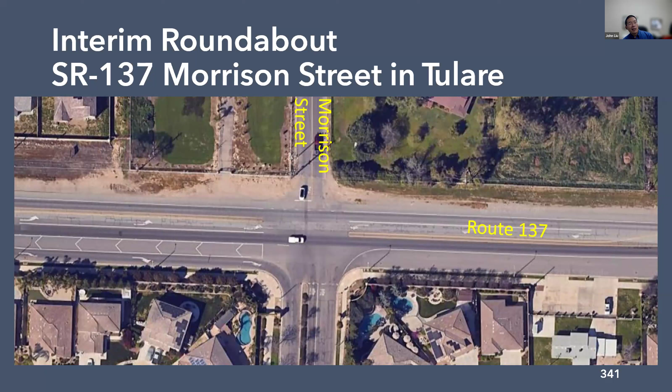Because of supply chain issues, it was going to be a challenge to get a signal in a timely manner. What I initially proposed was to look at putting a temporary roundabout until we really need the permanent signal. As the costs escalated for the temporary roundabout, and as we were concerned about pedestrian crossings and various features being added, we started to think, what if we just did a more permanent roundabout? It may not be the ultimate configuration, but it will give us better safety outcomes than a traffic signal. Then maybe eventually we could build an ultimate multi-lane roundabout when the north lanes get developed.

So we worked with the city, where the developer contributed $350,000. Even though they had to build the signal, under this scenario they would just contribute $350,000 towards the roundabout. We were able to come up with $1.25 million from our minor program. That's something that will not always be readily available. We also have to look at whether these improvements will have independent utility when we start mixing and matching funding.

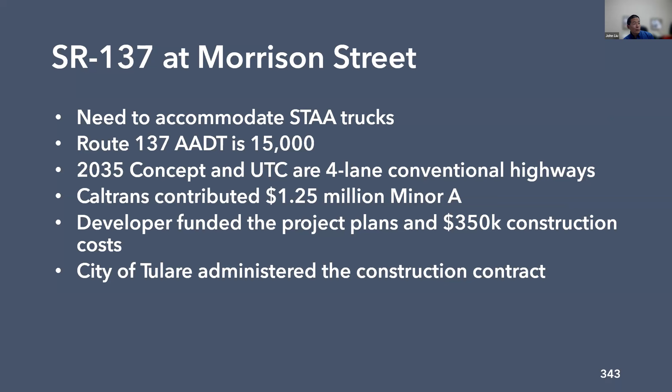Okay, so the last segment, I'm going to be talking about public outreach. Public outreach is becoming more and more important at Caltrans. We really want to have projects that meet the needs of the users and the communities where our highways pass through. It's not our way or the highway, or whatever the saying is. We really want to work with the community and meet them where they're at, making sure we're accommodating their needs, their modes of travel, and looking at the context of the highway.

So we have more and more public outreach being built into our processes. But sometimes, if we're looking at different types of configurations, we may need to go beyond our standard processes, particularly with more innovative solutions that may not be readily understood by the public. Late in the process, we may have new variations or alternatives where we want to go out and get more feedback, making sure the public really understands what we're proposing and how it's going to operate. And not only for the public, but also local officials.

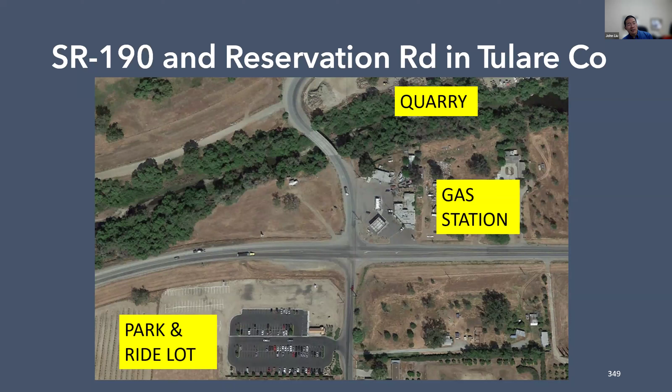We proposed a roundabout at this location, which had a high collision rate, with a pattern of people pulling out from the side road and getting broadsided. We had a couple of alternatives: a good-size roundabout of about 150 feet, or a signalized intersection. The signalized option was actually more expensive because we had to correct the profile on the state highway.

We did have a public meeting, and the roundabout wasn't necessarily well received by everybody. Some people liked it, but property owners had a lot of concern, particularly around the quarry corner. Someone put up a billboard saying '190 roundabout here, tell Caltrans no,' and posted the project manager's phone number. The local newspaper ran an editorial saying the Highway 190 roundabout lacked input.

The editorial said that many had concerns: motorists traveling 55 to 65 miles per hour would have to slow to 15 to negotiate the roundabout, calling it very dangerous. This reflected their perception that a roundabout would be dangerous because people have to slow down to go through it.

At the public meeting we tried to alleviate their concerns and explained why we were doing this, but the newspaper ran the editorial anyway. There was also a Facebook page and a lot of social media chatter about the roundabout. Still, we proceeded with it, since it really was the better solution.

We worked very closely with the Native American tribe since it affected their park and ride lot, incorporating elements of their culture into our landscape architecture treatments. This became one of our more attractive roundabouts, and after it was built it was very well received, with essentially no complaints.

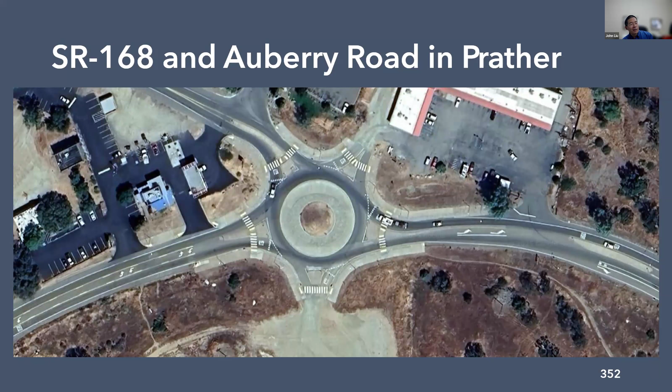You can imagine it'd be very hard to turn around at a standard rural intersection. So this is one very easy way to provide trucks to turn around. And if there's a PSPS power shutoff, this roundabout's going to work, whereas the signal may potentially go dark.

Lastly, very recently we had a public meeting in the small community of Stratford, which is in Kings County, about a half an hour south of Fresno. This is a community that feels they've been left behind.

We recently got a lot of complaints about wanting left turn channelization when a gas station was placed in one of the corners. But when we went through local development review and did the analysis of left turn channelization, it didn't meet warrants. We did not require the developer to put left turn channelization. But the community felt very strongly that they need to have left turn lanes to go into the community.

They contacted us, and we wanted to have a public meeting, kind of a listening session, to understand more clearly what their concerns are. So we looked at a couple options, potential left turn channelization.

We don't really have crash history that justifies a safety project, and certainly not the crash history to justify a roundabout. But we want to see if we can actually build a low-cost roundabout for maybe about $2 million. One thing I didn't mention for that previous roundabout in Tulare, that roundabout was a total cost of about $2 million - about 1.6 million. I mentioned before, $1.25 million that we contributed, and 350, so it was about 1.6.

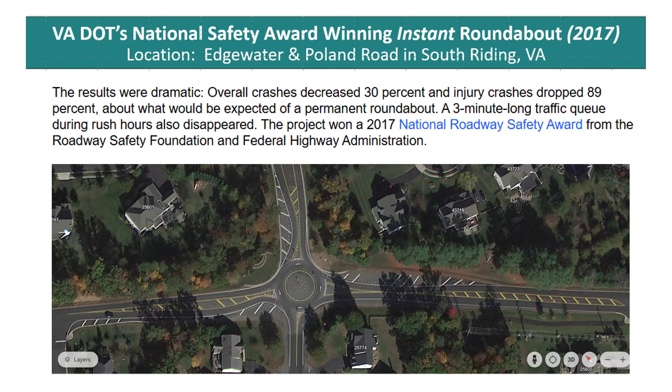I want to mention also, let's go to the next slide, because I think what's really important here was the process you just went through: public engagement. As usual, this was not easy for the community to accept. They had a problem. I think in this case Virginia DOT proposed a roundabout, and there wasn't a lot of positive support for a roundabout at this residential, rather rural, neighborhood location. What VDOT did was propose an instant pilot project, which you just saw photos of.

What happened was that based on the immediate relief from the operational problem, and then seeing the crashes go away, the residents asked for a permanent roundabout.

The last important part to mention is that this led to a question. During the 3 or 4 years that plastic roundabout was in place—and this is snow country—they had a lot of maintenance headaches. A lot of pieces had become dislodged or broken and had to be repaired or replaced. This led to questions about a more durable plastic system, which led to this contract, where Phil Rust and the city of San Diego are now using these systems for permanent installations. Quick build, low cost, and relatively easy to maintain, though not as easy as a traditional method—that remains to be seen. We don't know, but the expected life on these durable materials is probably at least 50 years.

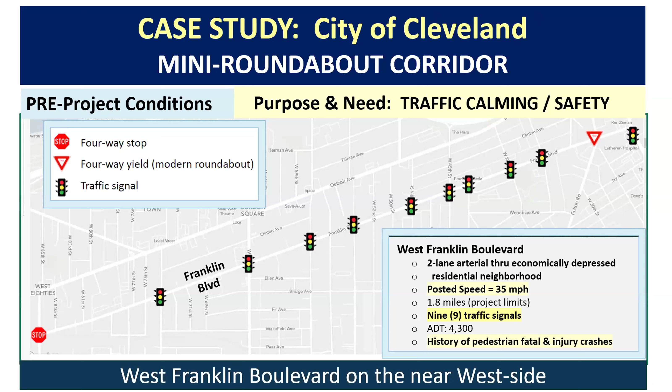As we look at photos, you'll see the work implemented was relatively minor at each location, because the infrastructure, speeds, and traffic basically permitted that. Let's go to the next slide.

The post-project results—they did an immediate evaluation, and periodically after all the roundabouts had opened, in 2 phases. What they focused on initially and wanted as an objective was reducing speeds in the corridor, because over that 1.5 to 2 miles there had been speeding and crashes in this residential area. They measured almost immediately a significant drop in the 85th percentile speed down to 27, from about 35-36 miles an hour. Since this had been signed at 35 mile an hour, they immediately implemented a 25 mile an hour speed zone along this corridor.

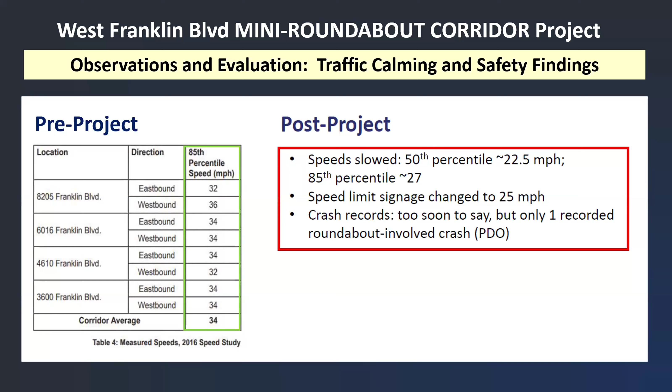They also recorded and monitored crashes, finding only 1 recorded roundabout-involved crash in the after period, after about a year. So more time is needed to fully evaluate the safety benefits. Okay, next.

Again, just to emphasize the speed reduction, new speed limit, and crash reduction. Okay, let's move on to the next one.

Okay, this is something I showed yesterday. I wanted to spend just a little bit more time on it. I think it deserved that because, as I might have mentioned yesterday, we really haven't been taking advantage of some of these safe system or alternative intersection concepts. And one of them on the state highway system is the R-cut.

When I say this, I'm talking about a reconfiguration that allows U-turning by the design vehicles. While there are a lot of right-in, right-out driveways, those have more impact on commercial vehicles. They have to find alternative routes circulating around so they can make a right and a right and a right to make a left, instead of a simple right, U-turn, and then come back to the intersection.

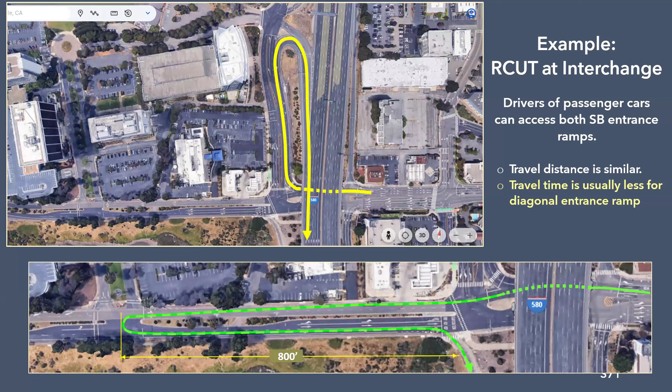What's important to note is that the travel distance is about the same, so there's no out-of-direction travel in this case. And the travel time is usually less for the diagonal entrance ramp. So really a simple, easy way to relieve congestion at an interchange.

Okay, I don't know if you want to go one more, John. This is the last one, actually. Could be - this is really meant to be more of an exercise when we've had workshops in person. This is another case study, a good example of how to use the ICE process as a tool, as opposed to comply with a number of process steps.

This is a rural two-lane state highway where, as the yellow diamond indicates, a new public road intersection was proposed. This goes back to 2013, maybe a month after the ICE policy was adopted. In this District 4 proposal, this led us to meetings to talk about how we needed to plan all the ICE studies in order to make a decision about this new public road connection serving a planned development. You can see there a big ag area, and some development activity shown here.

Let's go to the next screen. Okay, so that gives you an idea of the scale of what was proposed, and this is now moving forward. Just think of this as a development plan that was presented, a developer seeking permission from the county to build this, and from Caltrans to access the state highway - a high-speed rural state highway - for this planned community.

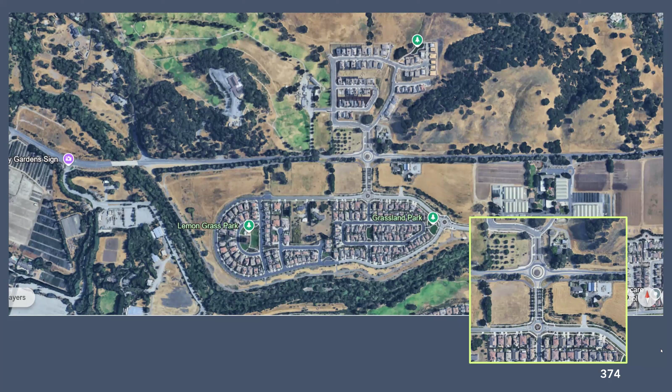I'll stop there and show that, as things have evolved and there's more understanding of what roundabouts can do, there are now a lot more of these, at least in rural areas. There'll be maybe easier agreement, less work involved, when everybody realizes this is maybe a lower cost, more sustainable solution in the long term. So I'll stop there. Any questions?

Yeah, Jerry, there's no questions in the Q&A pod.

I'd like to reiterate that point about going down to one alternative, because that could really facilitate projects moving forward, where you do not have to analyze multiple alternatives in the environmental process. You could potentially just go with a CE, particularly when there isn't a lot of public controversy. A lot of times the local agency also wants the roundabout, and they don't want to spend the time and resources to analyze the signalized intersection. So you could go ahead and reject the signal if it's going to be obviously poor performing, and just go with the better performing alternative. Keep that in mind, that you could save a lot of time and effort by going down to one alternative, and you don't have to go through stage 2 of ICE, where things are much more involved, going through the highway safety manual and such. A lot of times you're going to stop at stage 1, and you could stop right there.

I'll just mention, John, that I almost wish I had reinserted that slide from the safety analysis presentation, where that's probably what this would have turned out to be: a traffic signal would have been less costly, but the crash cost savings over 20 years for the roundabout would have been higher than for the signal. That would have been enough to say, we know this is going to have fewer, even if it's one fewer fatal over a 20-year period, and that's what can also tilt the scale.